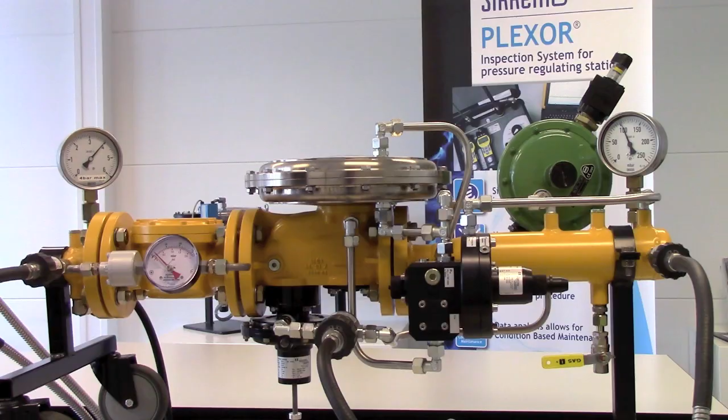In order to demonstrate the Plexor system, we have a functional model of a gas control line where we use compressed air to create an inlet pressure of 4 bars with the following components: a filter with a differential pressure gauge, a pressure regulator with integrated slam shut device, an outlet section with 100 millibars with a safety relief valve. Here we see the Plexor test device.

The system is IEC-EX approved and can therefore be operated inside the gas control station. The main components are a digital manometer for the inlet pressure, one for the outlet pressure. Out here we have a Bluetooth device for wireless connection with a tablet, laptop or PDA.

Here we see the function switch, which allows us to operate and test the various devices. This is the test lever to give a standardized pressure rise or pressure fall of 1.5% per second. And here we have the system connections: first one is for the inlet pressure, the outlet pressure, the sensing line of the slam shut device, and finally the ventilation.

The Plexor test device uses the inlet pressure to test the components of the gas control line. Various gas control line configurations can be functionally tested independent of the brand of the component.

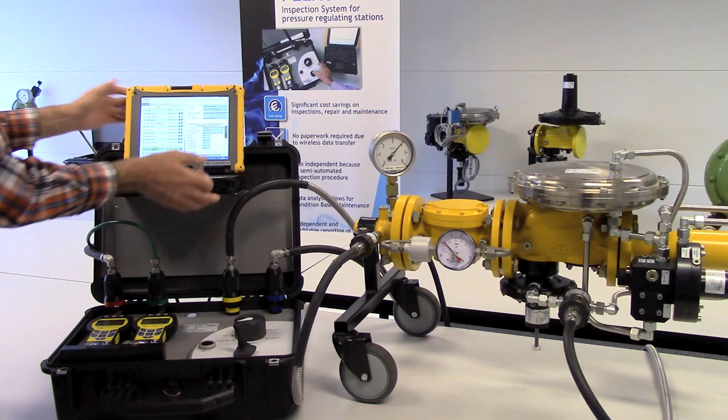Part of the Plexor inspection system is the connection software. This connection software contains several modules: the manager module to manage the data of the pressure regulating stations, gas control lines and boundaries and inspection procedures; the inspector software to perform the visual and functional inspections; and the diagnostics module to analyze the results of the functional inspections.

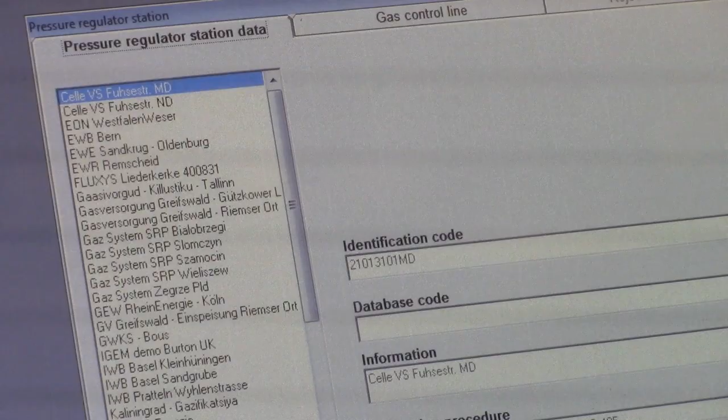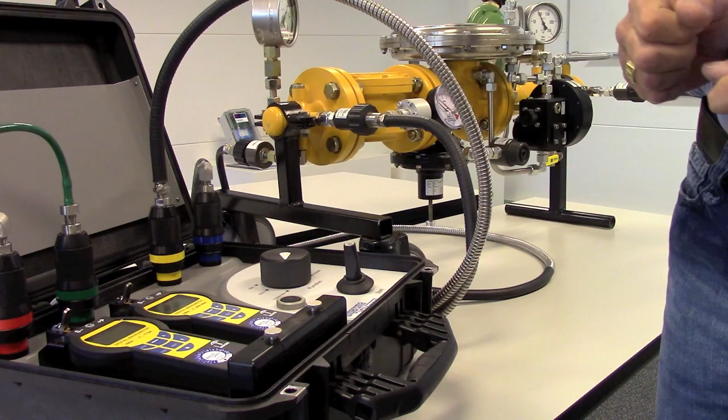The Plexor test device will be connected to the gas control line by means of color-coded, double-secured hose connectors. Against the clock, push with the clock, and by the unique dimensions you cannot mix up this connection. Take away the protection cap and connect the hose to the system coupling.

All hoses are connected: inlet pressure, outlet pressure, slam shut device and ventilation to the gas control line. All couplings have their own unique dimension, so you are not able to mix up the connection from inlet to outlet. By using the Inspector PC software on the tablet, selecting the gas control line, make connection to the Plexor test device, the operator will be guided step by step through the functional procedure.

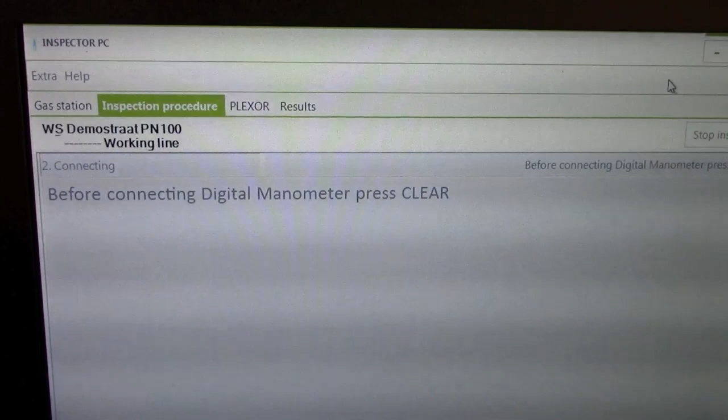Before connecting the digital manometers, we press clear 0 to adjust the manometers. Connect to inlet and outlet pressure and go for the next step. Put the switch into the position control line. And go for the next step.

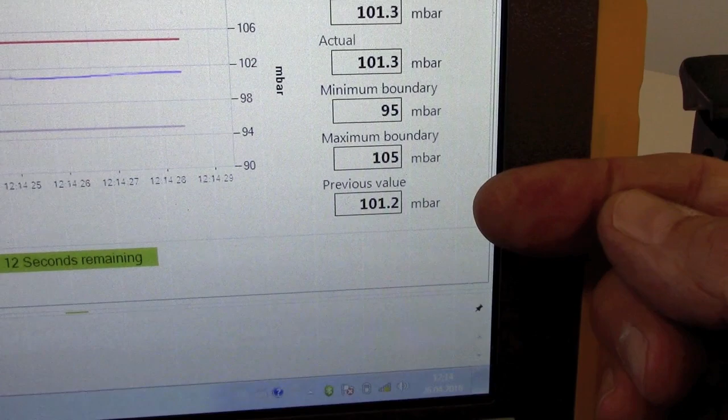Now, for 30 seconds, the outlet pressure will be measured, showing us the current value, the boundaries, accuracy range of the regulator, and the last previous value. That's the result of the last test.

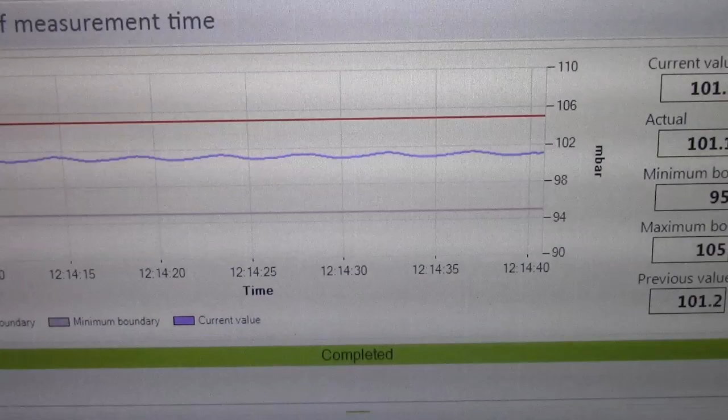This measurement is 30 seconds and will log 10 measurements per second. After this beep, the display shows us the complete 30 seconds of this measurement. We are inside the boundaries, so we can continue with the next step.

We are now closing the outlet valve and go for the next step.

We are now opening the ventilation valve in the gas control line to have a stable situation. Go for the next step.

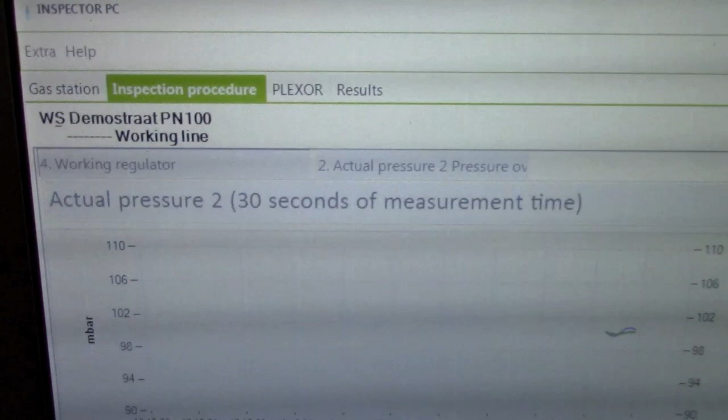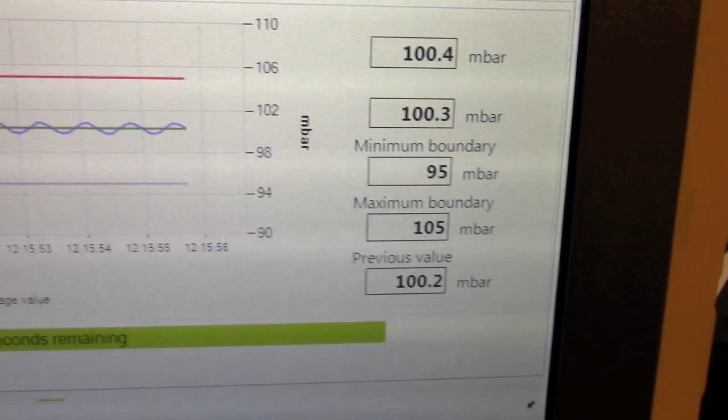We are now measuring the actual pressure simulated over the ventilation valve to check the set point of the regulator. The value is 100 millibar, accuracy range 95, 105, and the last value was 100.2 millibar. This measurement is also done for 30 seconds, so it's within the rejection boundaries.

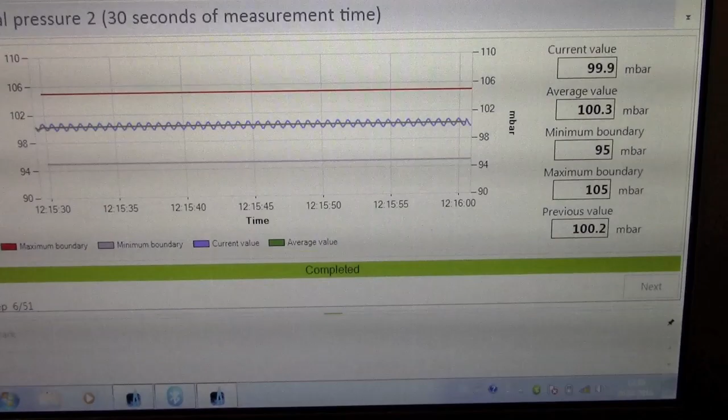We are able to continue the measurement by closing the ventilation valve.

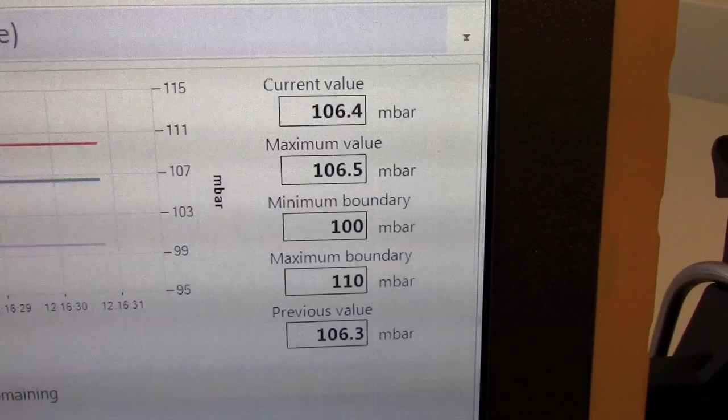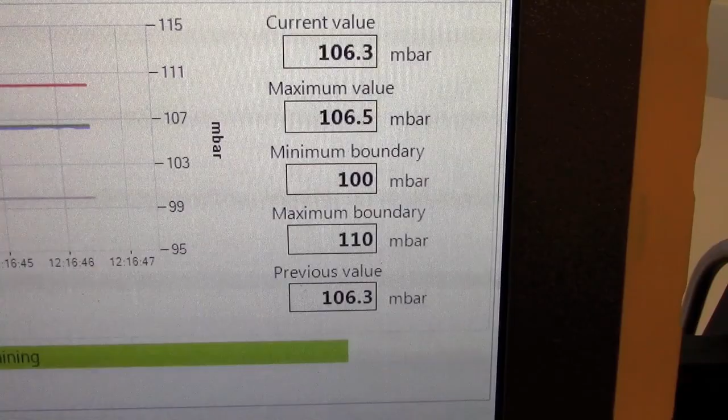Next step. Now the lock-up pressure measurement will be starting for 30 seconds. You will see the current value 106.4, the boundaries 100, maximum 110, and our previous value from the last test was 106.3. So we are inside the limits of the regulator lock-up pressure.

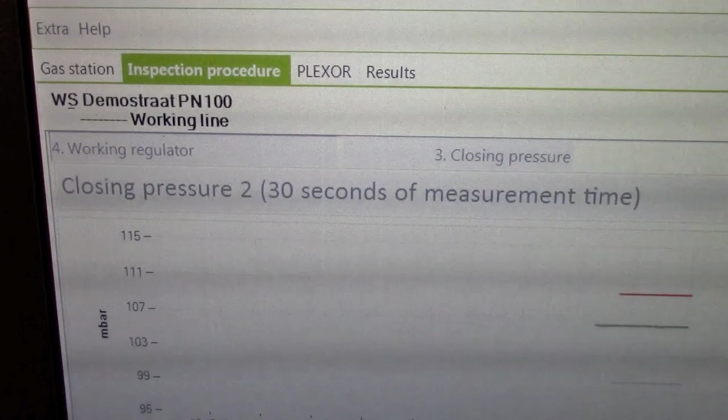Next step, we are now opening the ventilation valve again and directly slowly closing it again to simulate some pressure. And now for the next step, we measure the second lock-up pressure also for 30 seconds.

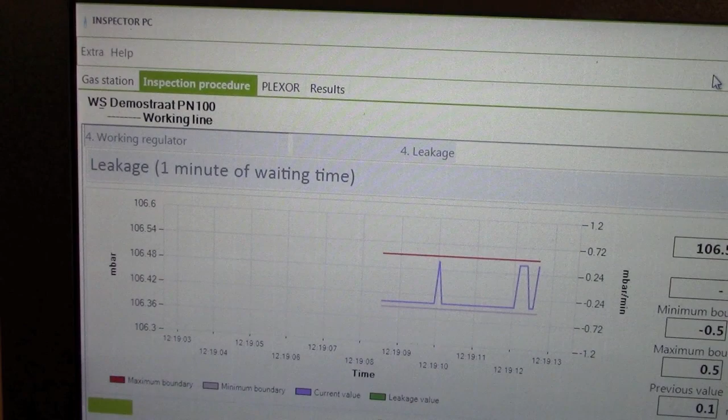The second lock-up pressure measurement is done to verify the lock-up pressure set point of the regulator. The next step automatically starts the leakage measurement for 1 minute by lock-up pressure.

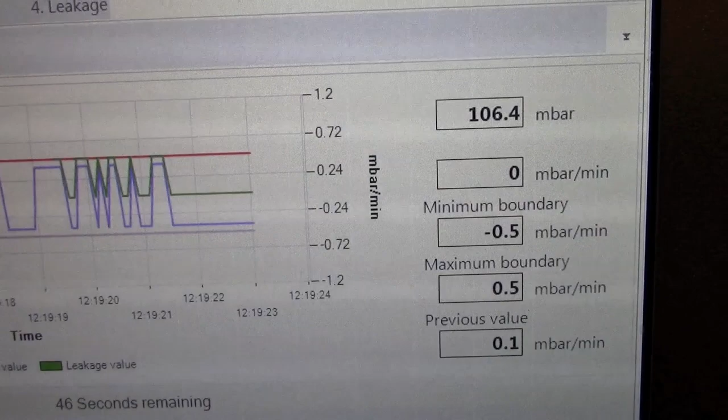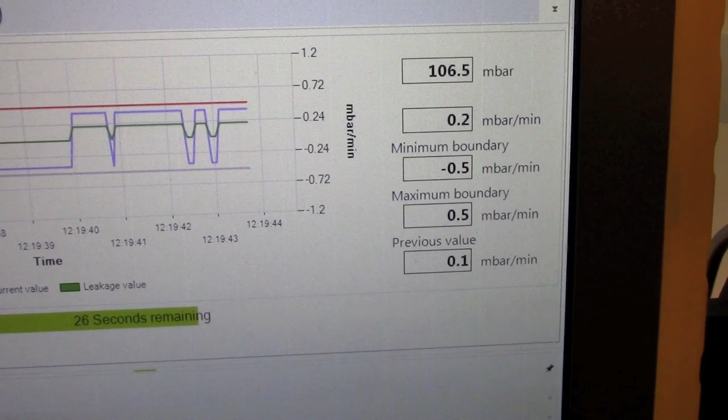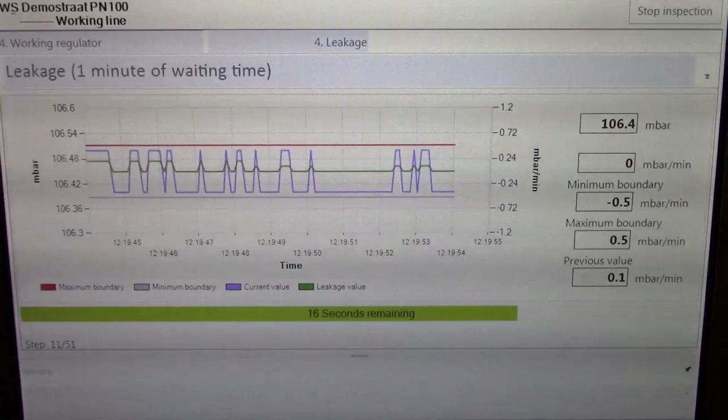We are now measuring if the valve of the regulator is closed, and we see a leakage value of 0 millibar per minute, within the limits of plus minus 0.5, the accuracy of the Plexor test device. Our last measurement was 0.1 millibar. So you're able to check directly on location the previous value, today's value, and our limits.

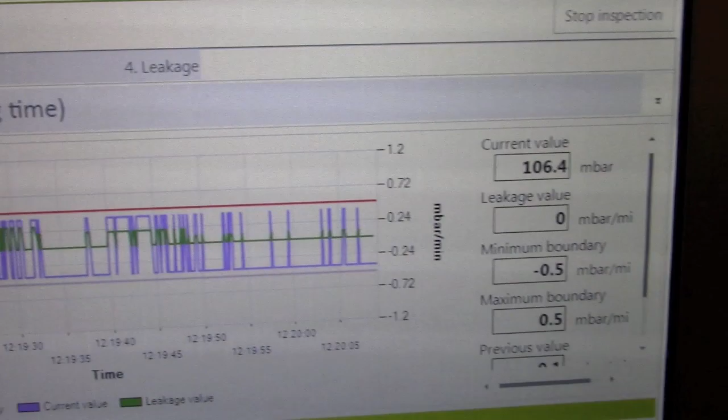The results are inside the boundaries, so we don't have to restart the measurement again. When there are regulators with a slowly closing valve, it can happen that it moves very slowly to closing lock-up pressure. Then we can restart the measurement again. We go for the next step.

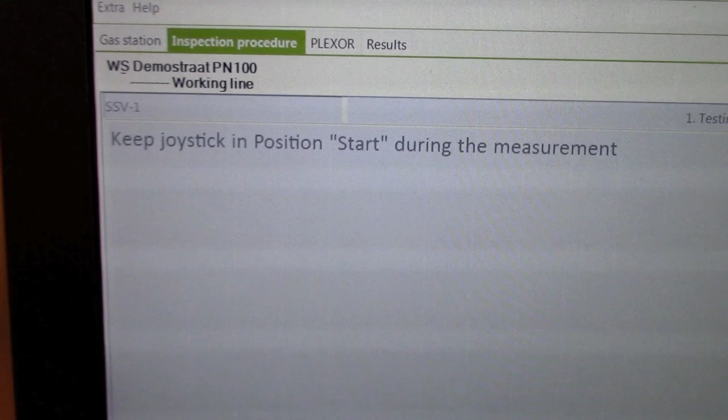Now we will start the joystick in position Start, and we are now measuring the inside part of the slam-shut device, meaning membrane, O-ring, etc., to test the inside closing. There is no leakage at this moment.

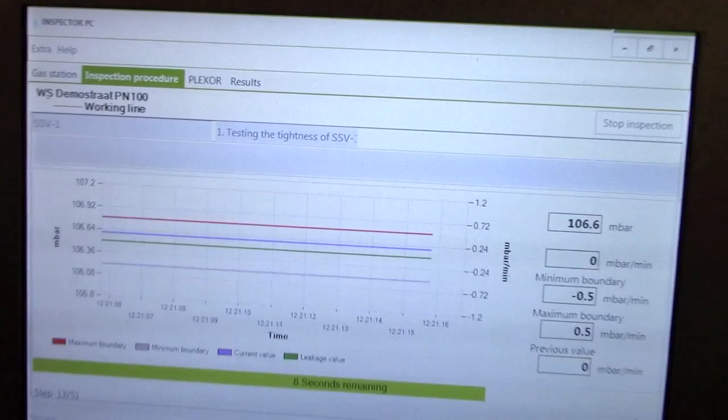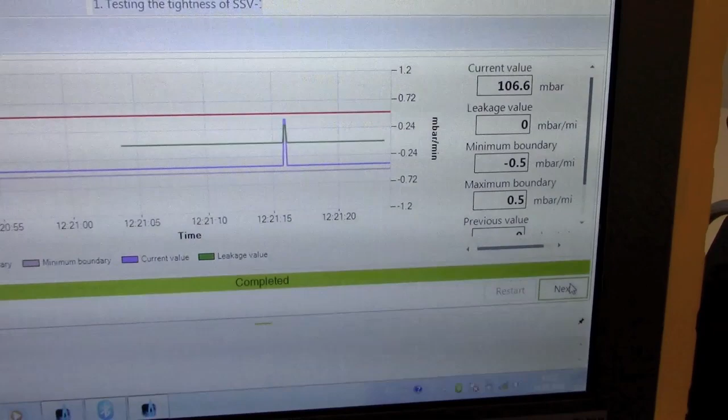So this is completely okay. We can show also the last value, which was also 0. So the status is it's fully closed. Now we go for the next step.

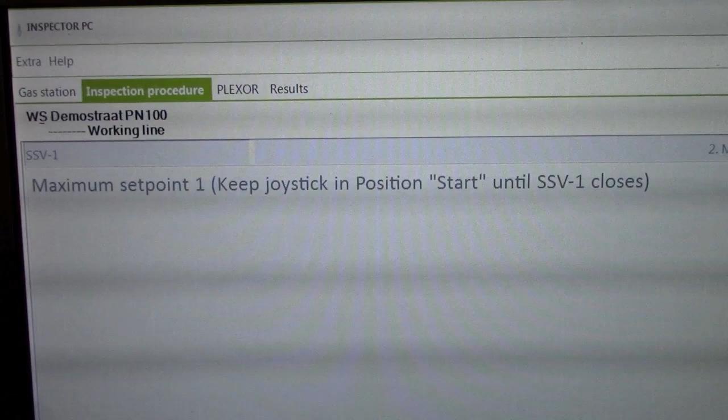Put the switch into the position slam-shut device plus to measure the maximum set point of the slam-shut. We keep the joystick in the start position and wait till the slam-shut device closes.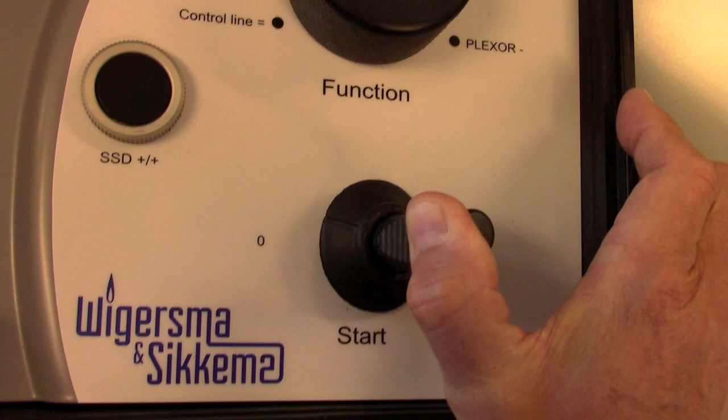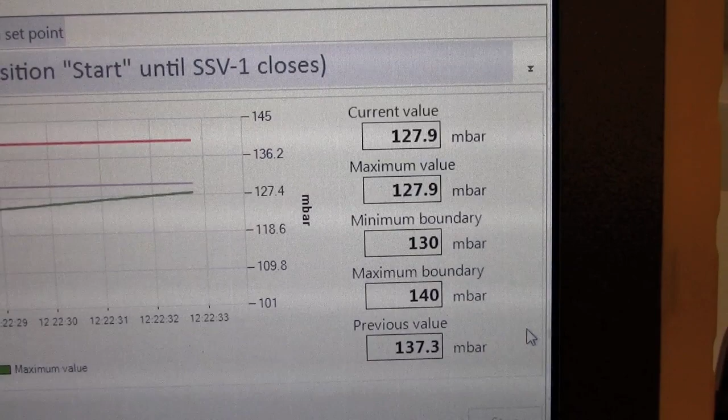The pressure will automatically increase by 1.5% per second. You see it in the green line. The reaction boundaries are 130, 140, the accuracy range. And now we wait till the pressure meets the set point of the slam shut.

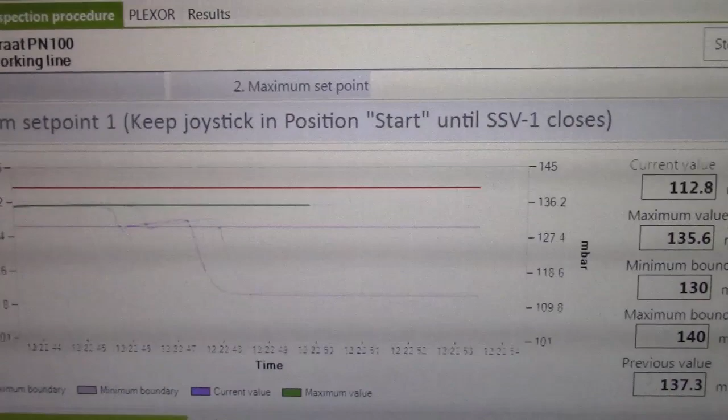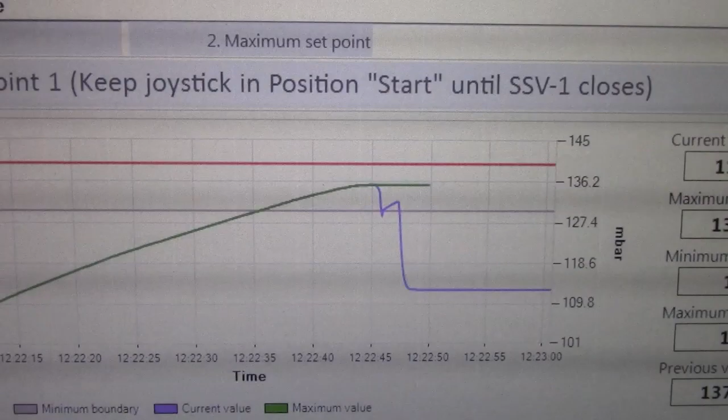The slam shut closes and we stop the measurement. We are now logging the data, and in a few seconds you will see the graph of the pressure increase and the closing of the slam shut.

The slam shut closes at 135.6. It's within the boundaries, and our last previous value was 137.3.

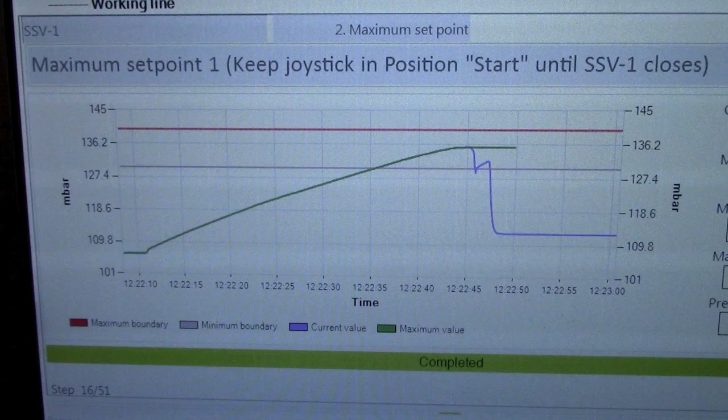First measurement is done to measure the sticking value, the second for the actual value, and the third can be done to verify the set point. In this configuration, the safety slam shut also has a minimum protection.

So the next step will be put the switch into the position slam shut device minus and go for the next step. For set point number 1, we keep the joystick in the start position till the slam shut closes.

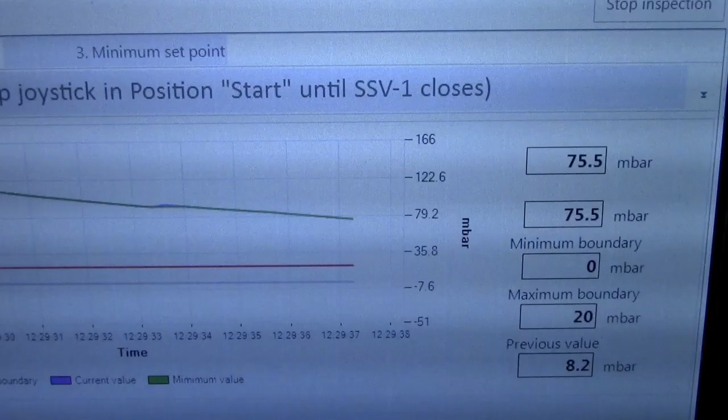You see the pressure drop on the green line, and we wait till the slam shut closes.

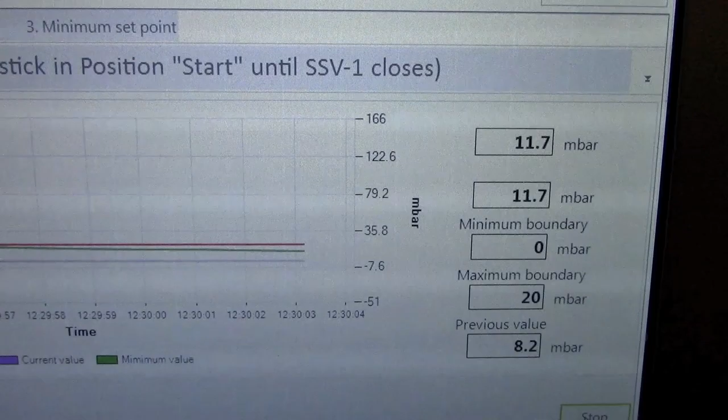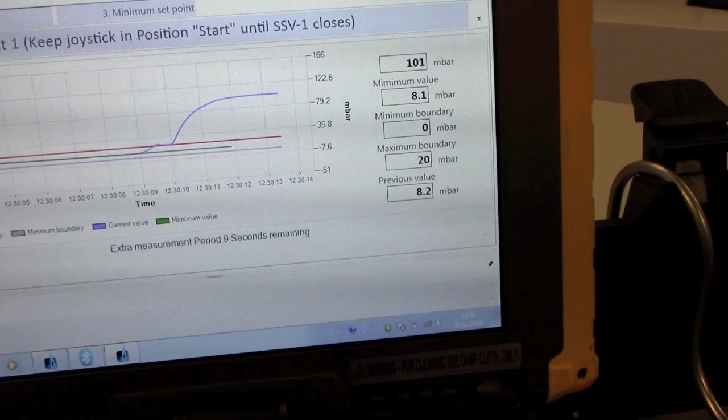At the moment the slam shut closes, we loosen the lever, and now the data is logged and shows us in a few seconds the result of this measurement.

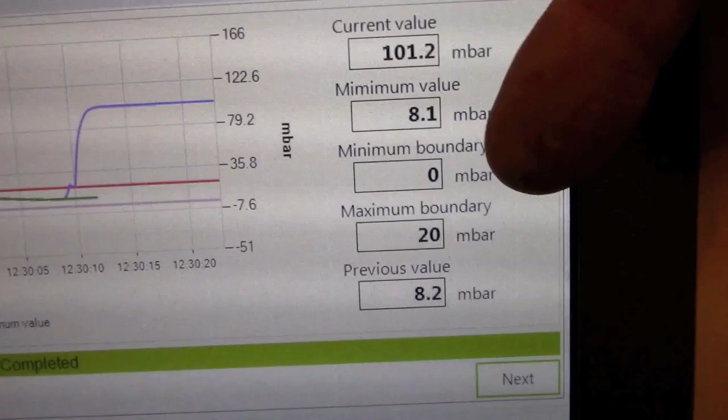The pressure drop actual value is 8.1, it should be within the limits of 0 to 20 millibar, and our last value was 8.2. So the results are okay.

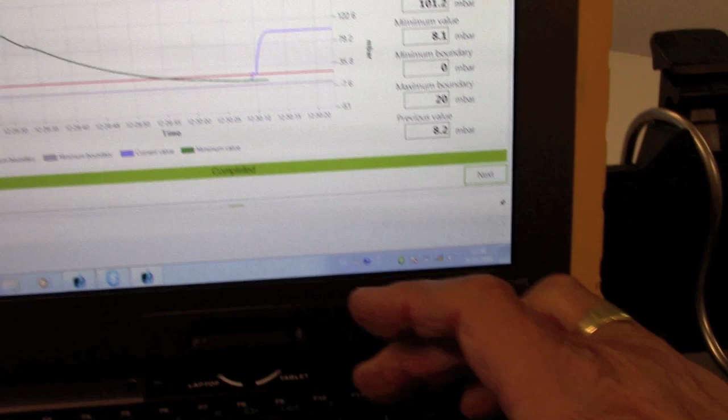We go for the next step and reset the slam shut device for the second measurement. After the second test of the minimum protection, we do not reset the slam shut device and go for the next step.

Now we reduce the outlet pressure to 10% under the network pressure. The network pressure is 100 millibar.

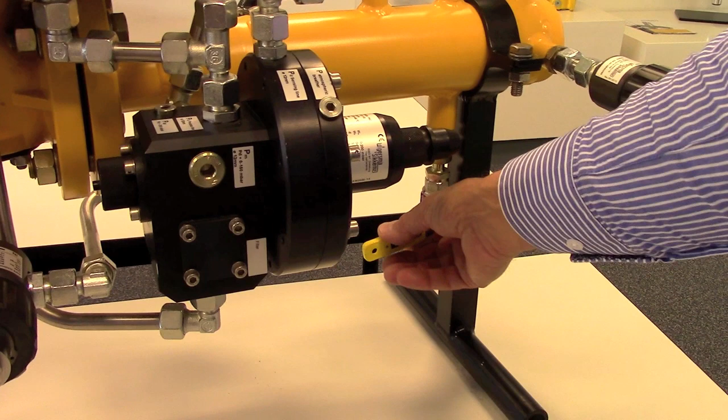And we go for the next step and wait for 2 minutes to stabilize the outlet volume to be able to measure the closing of the slam shut.

Now we automatically start for 2 minutes the tightness test of the valve of the slam shut device.

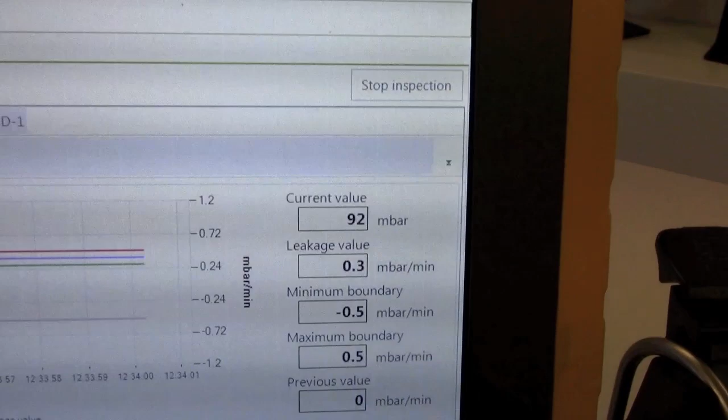The slam shut device leakage value is 0.3 millibar per minute. It's inside the boundaries, so it's okay. The slam shut valve is fully closed.

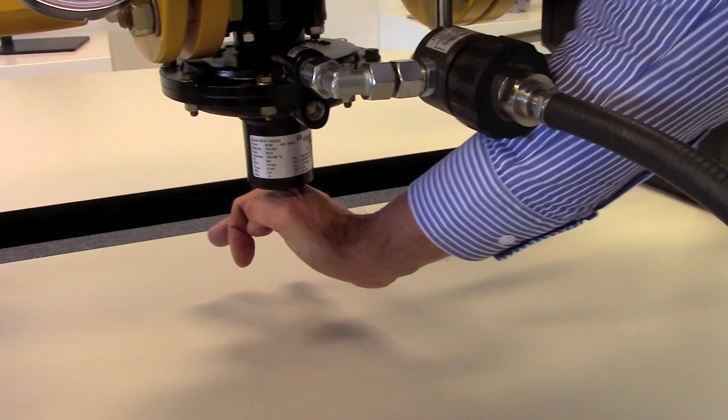After the tightness test of the slam shut valve, we reset the slam shut. Okay, and go for the next step.

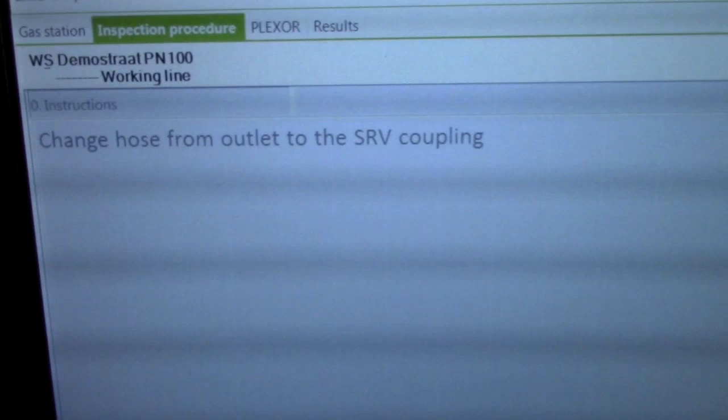Now we have tested the regulator and slam shut, and now we are changing the hose from the outlet pressure to the safety relief valve.

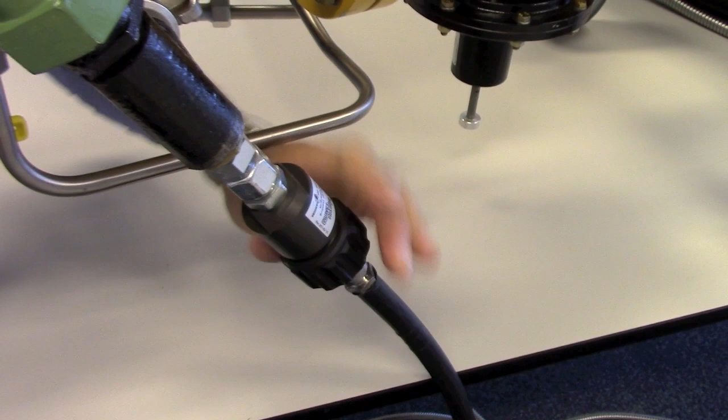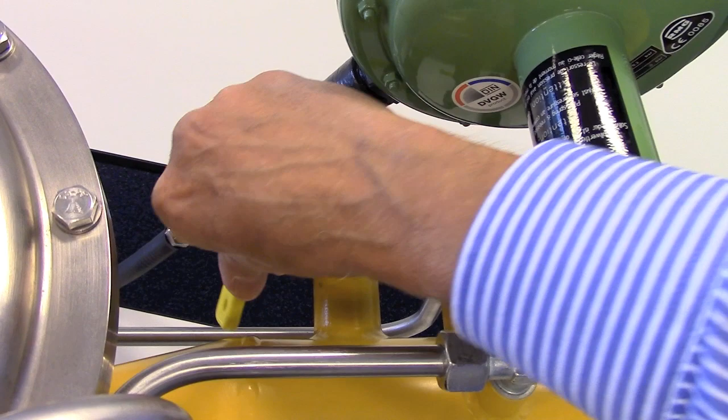The next step, close the valve in the pipe of the slam-shut relief valve. After connecting the hose to the safety relief valve, the next step will be close the valve from the relief valve to isolate the safety relief valve from the gas control line. We go for the next step and put the switch in the test position relief valve.

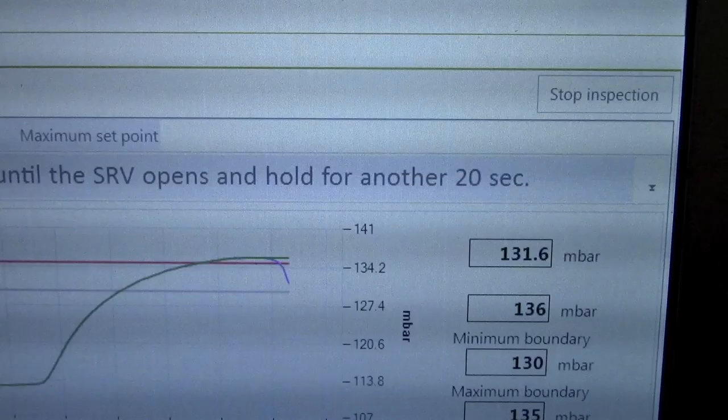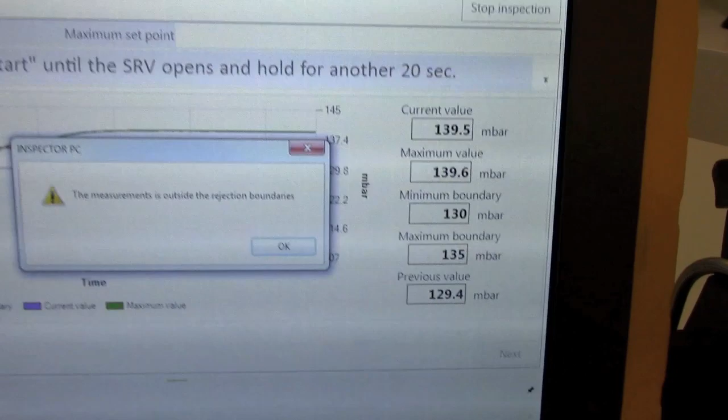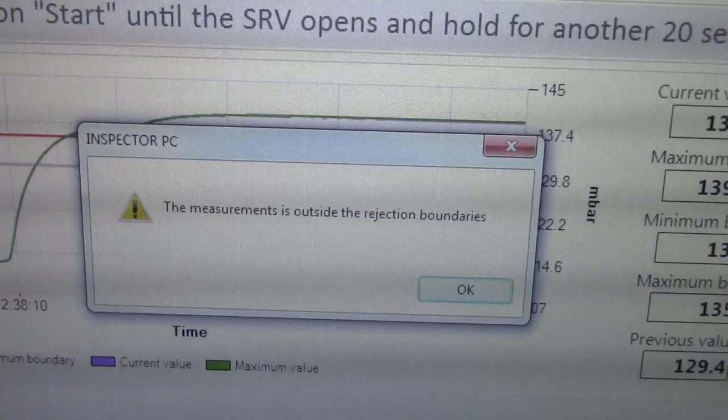Next step, keep the joystick in position start until the safety relief valve opens. Okay, we can now stop the measurement, and you see we are outside the boundaries. The current value, the set point, the opening value of the safety relief valve is 139.5 and should be within the limits of 130, 135. So there is a message that we are outside of the boundaries, and the operator can decide how to continue or to take action, direct action.

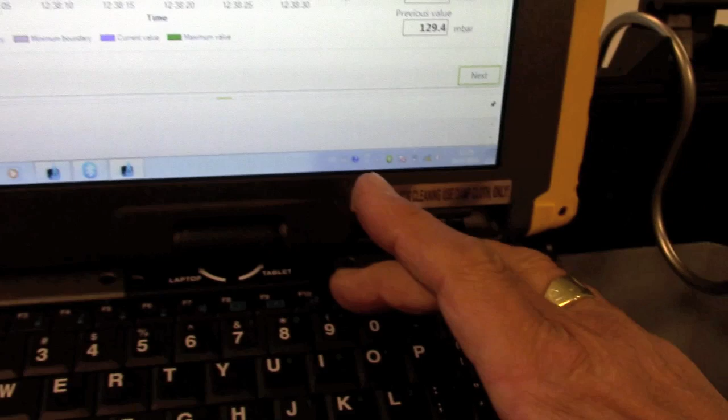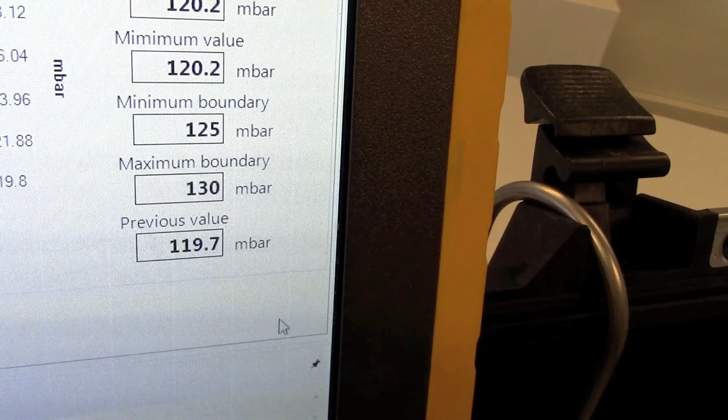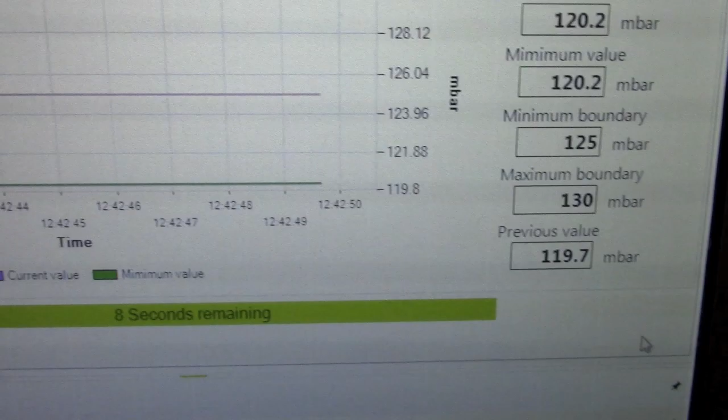We go for the next step. The next step will now measure the closing pressure of the safety relief valve. The closing pressure of the relief valve is 120.2 millibar. The boundaries, the minimum boundary, is 125. So it's outside the boundaries. And after a few seconds, we will see the results displayed on the computer. The measurement is outside the rejection boundaries, and the operator can decide how to continue or take action. We go for the next step.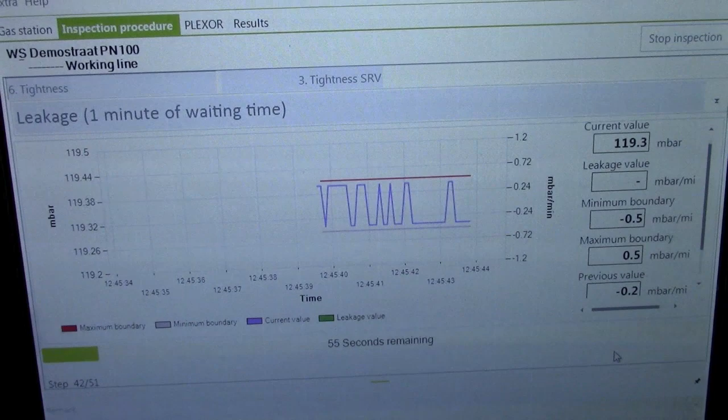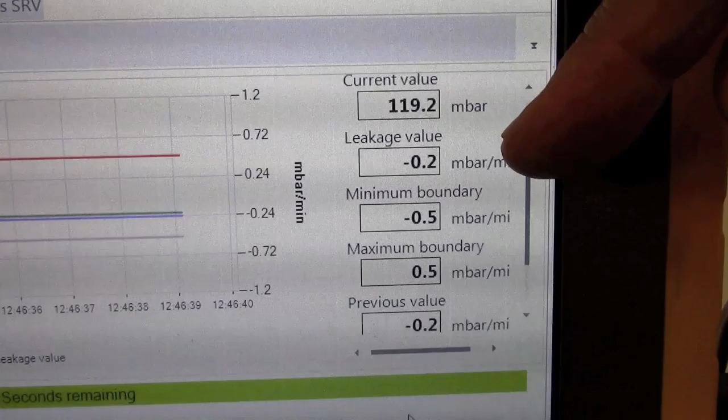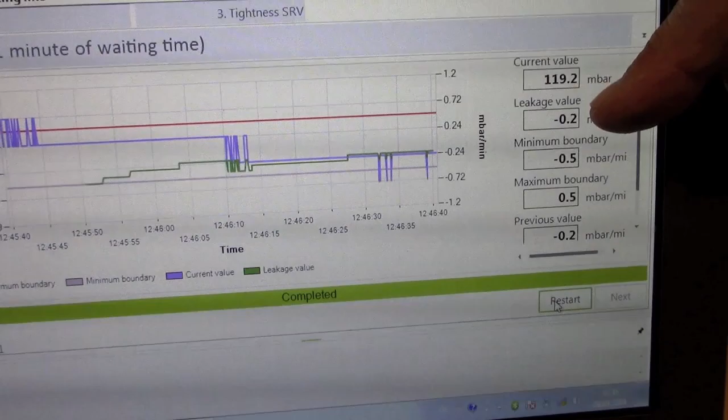Now automatically the tightness of the safety relief valve will be measured and indicated in a leakage value in millibar per minute. We see that the leakage value is minus 0.2. It's inside the limits, and when this minimum leakage value is minus, then it means it could be having an external leakage. And now you see it's okay, and we don't have to restart the measurement, so we can go for the next step.

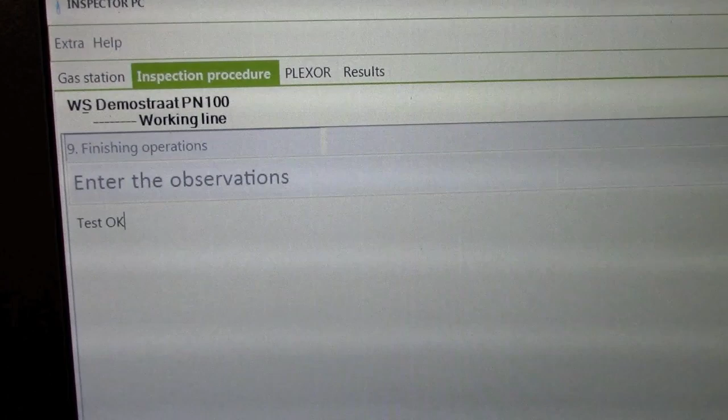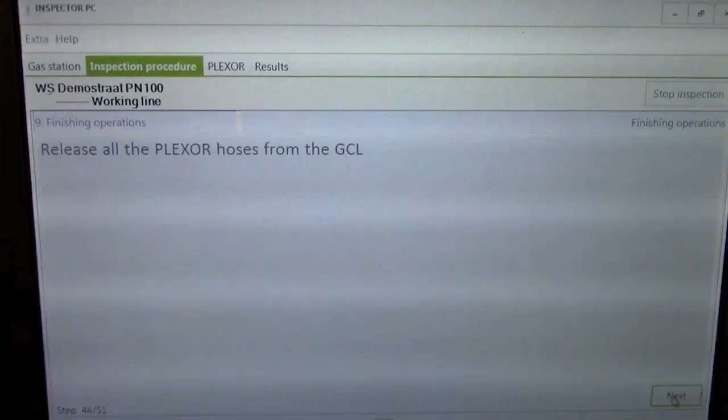After this test, we are able now to enter some observations, and in our opinion the test was okay. Test is okay. We release all hoses from the gas control line. Inlet pressure, outlet pressure, safety relief valve. And we go for the next step. Put the switch into the position Plexor minus. Keep the joystick in position start.

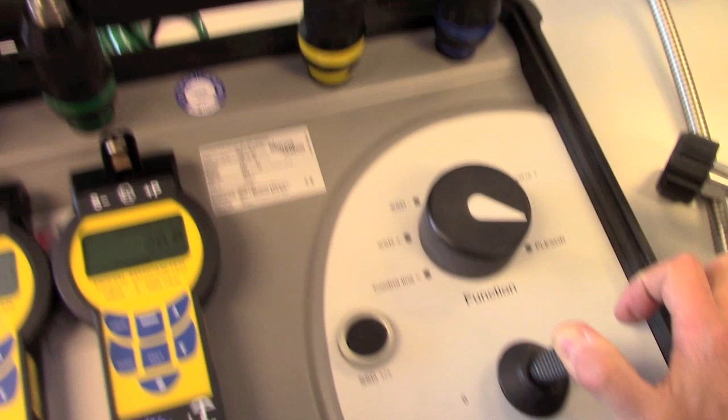Now we are ventilating all pressures inside the Plexor test unit and the hoses to be able to make a new measurement on another gas control line. Both manometers are showing us that there is no pressure anymore in the Plexor test device and the hoses. So now we can go to the next step. We put the gas control line back in the working position. Opening the outlet valve. And go for the next step.

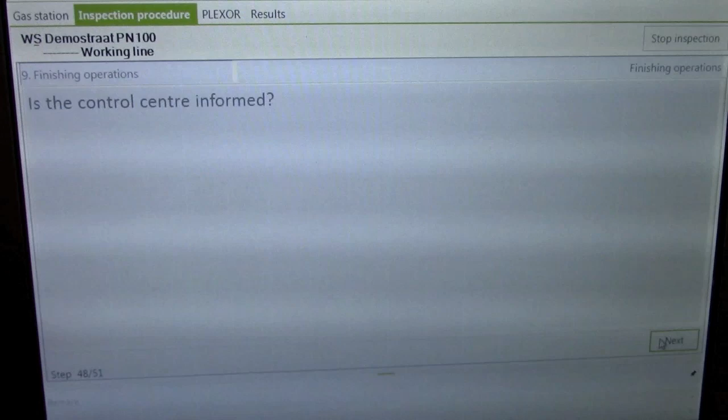Is the gas control line in the original working position again? Yes. Next step. Is the control center informed that we have finalized the test? Go for the next step. And now we can enter the name of the operator and go for the next step. The operator's name will automatically be stored in the protocol. Next step. We are now at the end of the test procedure, and we can prepare for our next functional test on another gas control line.

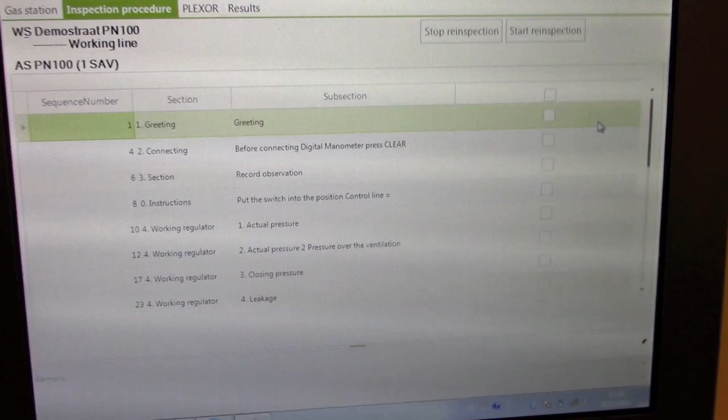And at this moment we are able to restart the program by testing those measurements which were outside the limits. When we do now start the re-inspection, those measurements can be done again. During the functional test with the Plexor test device, two datasets are generated. One dataset contains the results that can be presented in a protocol, and it contains all the measured values, as you can see here.

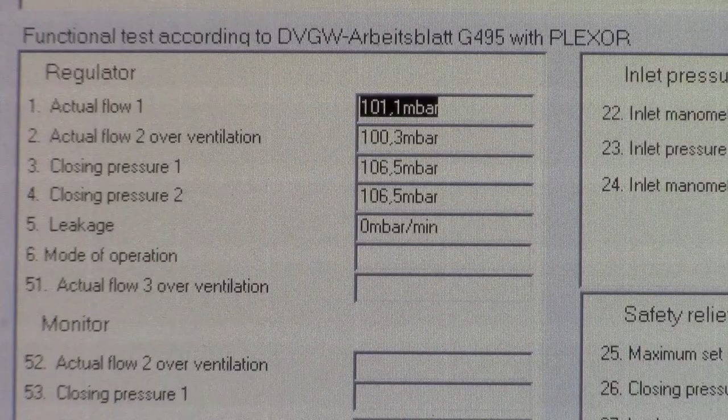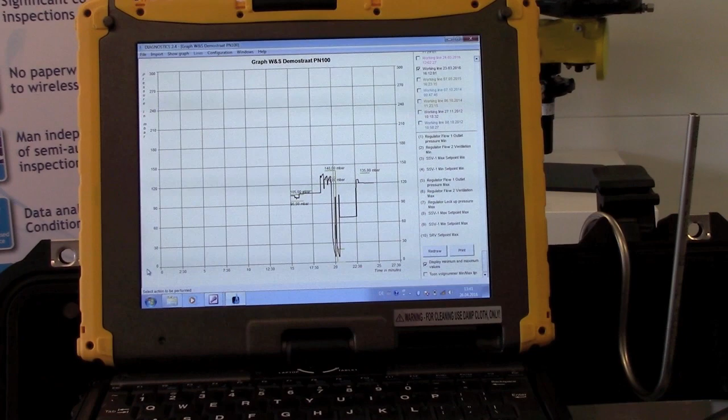The second dataset contains all the measurements of the complete functional test. By this dataset, I'm able to present the complete functional test in one graph, as you can see here. I can present up to 10 measurements in one graph, so I'm able to see if there are any trends visible on components, how they perform. The graph also shows the boundaries, so I can see if the measurements were inside my boundaries, yes or no.

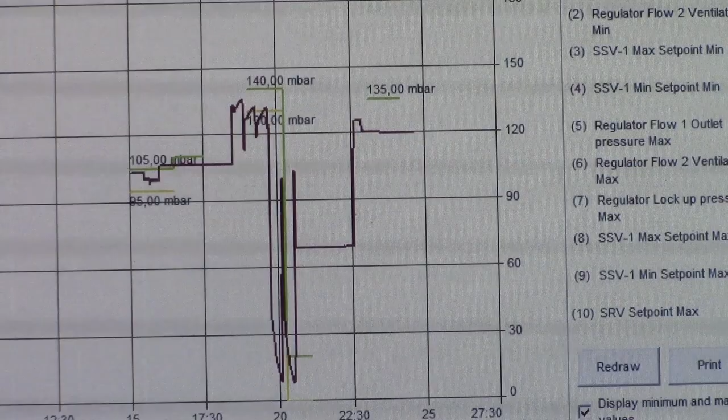If I see trends, I can decide to change my strategy, to stretch my maintenance and inspection intervals. And by doing this, I can save a lot on labor and spare parts. Concluding that by using this system, a lot of money can be saved.